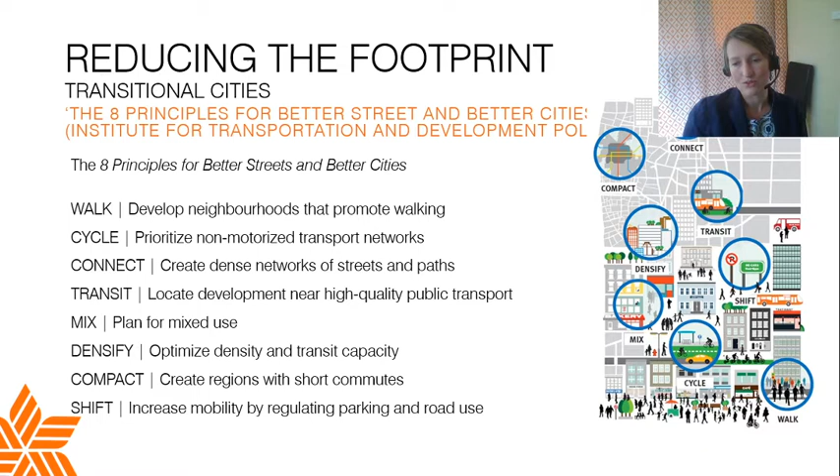So this is about changing the way we move. This is giving the opportunity to use more bicycles, to walk more, to connect with people, to have a more fluent transit, and also to densify, to save the land. I mean by that the agricultural land that gives us the opportunity to feed ourselves, but also the natural environment. And so this is about shifting to something different, where, for example, the car will have less space, or at least if it uses petrol and non-renewable energy, for example.

So if we look at the history of construction in Australia and the size of the houses, a study has been done to give us an average of the size of homes in different countries, and we can see that Australia, with an average size of 214 square meters, is pretty much a bad child in the history and in the world conception of using space for families.

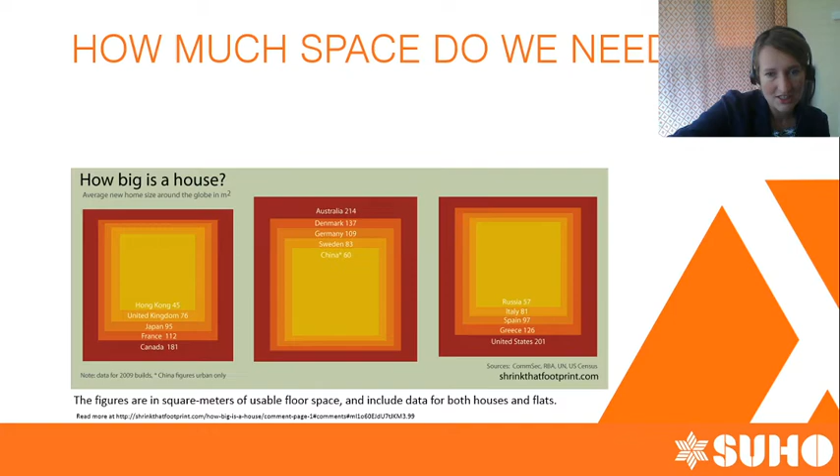Two of the main reasons are that the land is big, and I think there is no pressing need for reducing the size of the houses, but also because of the climate and the fact that there was not so much importance given to actually controlling the temperature inside the houses. So we can see that places like Hong Kong that have really high densities, or countries like Denmark where there are quite extreme weather conditions, have a small footprint for the houses. So the question is, how much space do we need to actually live in, and do we need to be big to live big?

So here is the situation of the project. It's on Glen Stuart Road in Woodford, in the development area, and the land is actually 310 square meters, which is pretty small. This is actually an affordable land at the moment, and what is really important in this project is to consider that we will deliver in the future houses that are energy efficient for a big part of the population. So we need to work with the constraints of small land that is affordable for most people, so they can really imagine this kind of project as achievable.

So how much space do we need? The 10-star house is actually only 116 square meters, on a small piece of land, with 3 bedrooms. If you look at the plan, we've really worked on the accessibility of the house, and we didn't want to sacrifice the healthy aspect, the affordable aspect, or the comfortable aspect of it.

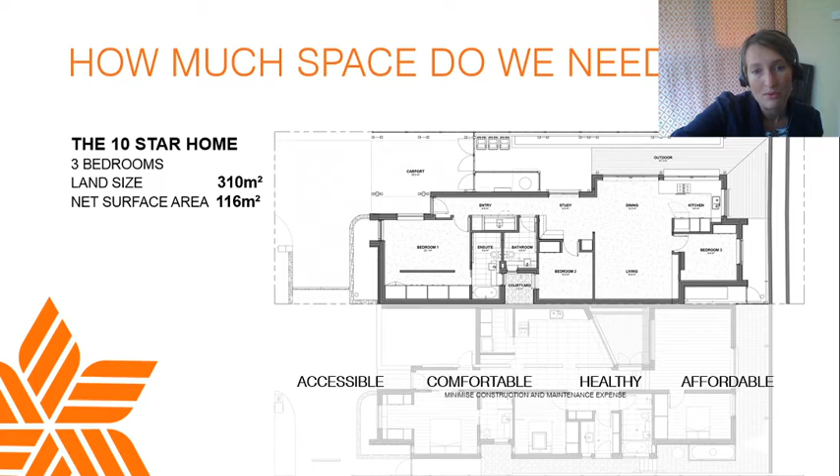This is about giving the opportunity to imagine a typology that's quite different, where even with a small surface area, we make it really efficient in terms of functionality and use every space. This house has a lot of transitional space, so we try to reduce the idea of a corridor, introducing laundries in the walking area, and having the nook enlarged at some point, opening onto a larger living area. Every space is used, there's a lot of storage, and there's a real relation between outdoor and indoor that gives us the opportunity to extend the space of the house outside.

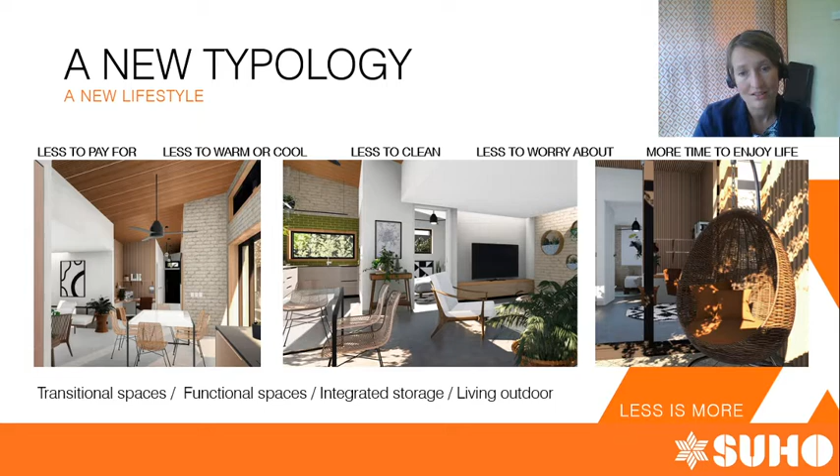Having a smaller house is also a new lifestyle. It's less to pay for, less to warm and cool, so in terms of energy saving it's really important. But there's also less to clean and worry about, so there's more time to enjoy life, and we shift the value of what's important to do with what we've got.

This is also about reducing carbon emissions. Working in the construction industry, we need to be really aware of the impact this industry has on the environment. If you consider the production of energy for residential use plus the energy consumption in the construction of dwellings, as well as the whole industry to make all these materials, we realize the construction industry accounts for about half of the carbon CO2 emissions in the world.

So there's a real concern about that, and I think it's necessary that we consciously work toward a different way to impact the emission of CO2.

One of these aspects is working toward clean sites and trying to reduce wastage on site, as well as the way we work with the trades—everything is recycled, and we're conscious about chemical use and what we do with the waste. But it's also, as mentioned before, about reducing the surface area. And after all, a really important point is using less energy to service the building.

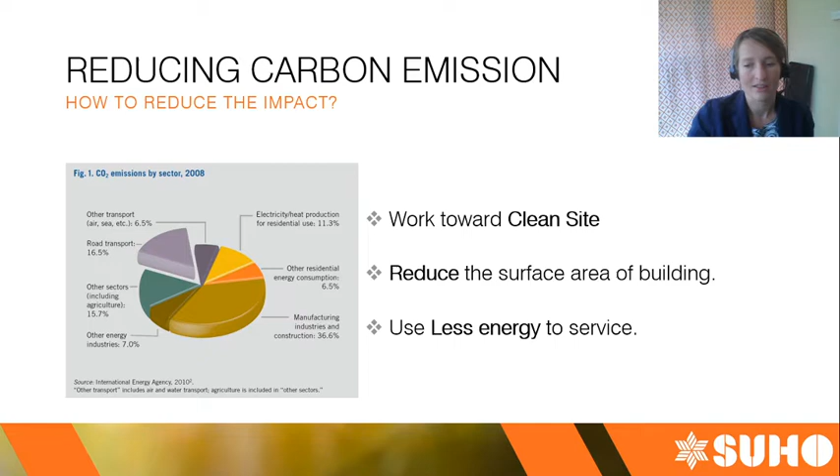Now let's go back to the 10-star challenge—it's a challenge, but also a really great journey. If we look at the average star rating of houses in South Australia, we're at about 5.4 at the moment, and the objective of the regulation is to move to a 6-star rating for houses as a minimum required for construction.

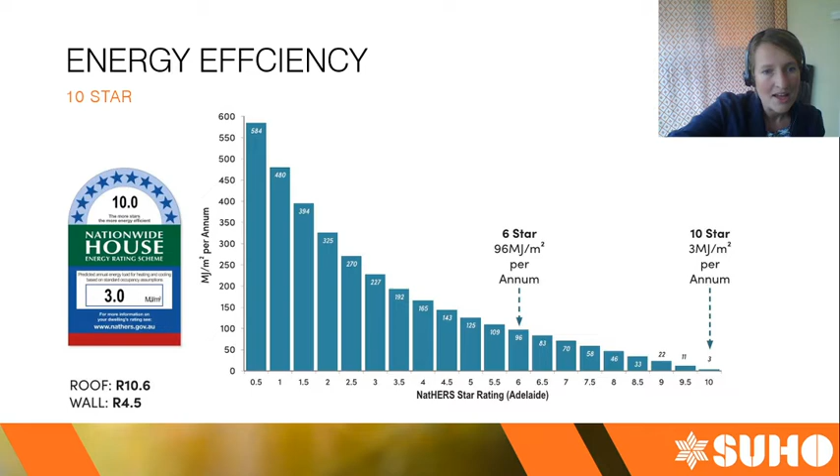Now 10-star is well over that objective. If you look at the consumption of a 6-star house, it's about 96 megajoules per square meter per year, whereas a 10-star house, which is basically nearly passive, is 3 megajoules per square meter per year. That has required thick insulation in the roof and walls, as you can guess, but it's also a more complex way to design that brought us to that point, and I'll explain it later.

So what does that mean? If we've got 3 megajoules per square meter—1 for heating and 2 for cooling—it means that most of the hours in the year, as you can see on the graph on the left side, are actually at an average temperature of 22 degrees.

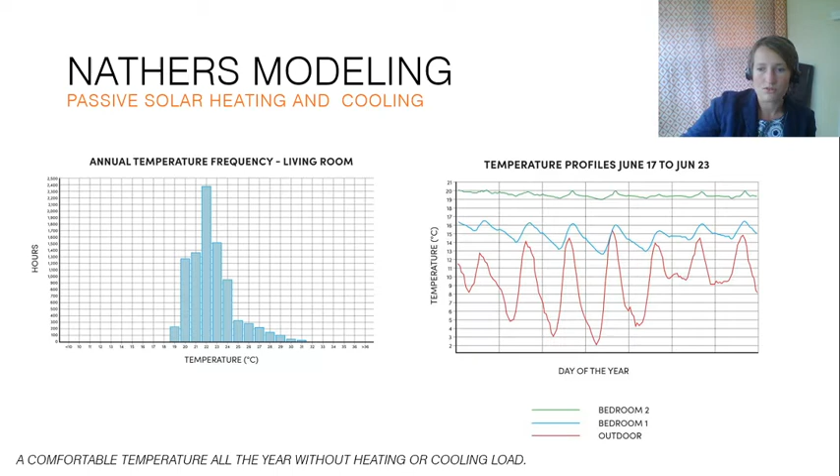So if we take this house without a cooling and heating system, we can see there's a really small amount of hours in the year where it actually requires energy to reach a comfortable temperature range. On the graph on the right side, the bedroom temperature all year long turns around 20 degrees, between 19 and 20, which is really comfortable. The other bedroom is lower, depending on its position in the house, but compared to the outdoor, the temperature is pretty good.

So how do we design a house that is a 10-star house?

This is a process that is quite complex, and requires knowledge into solar passive design, but also many different strategies in terms of how we build the envelope, how we work with the insulation and make sure it's safe for the building, which kind of windows we use, and how we produce energy. In this work, we went beyond the 10-star requirement to make sure all the aspects were actually taken into consideration, as we are really conscious that any certification system has its limits, and after all we need to work with reality. So we've been working on what we call a smart envelope, and delivering healthy and sustainable choices into the material and the energy production.

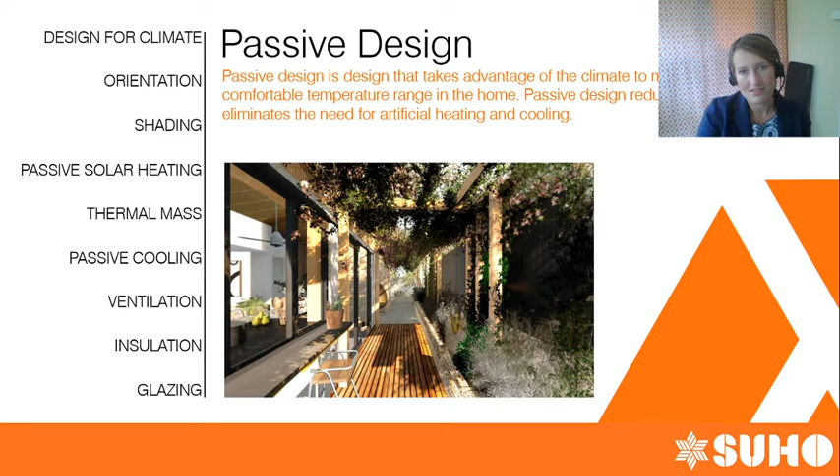One of the first principles used, and that is really important in creating a passive house, is to actually use passive design. I won't go through the whole system of passive design - that could be a whole webinar on its own - but there are many aspects considered to make a house with better passive design, one of them being to design the living area, bedroom, and service area with a sense of orientation. So this is north, you can see it clearly on the drawing. All the living areas are facing north in this building, and the bedrooms are southwest and southeast.

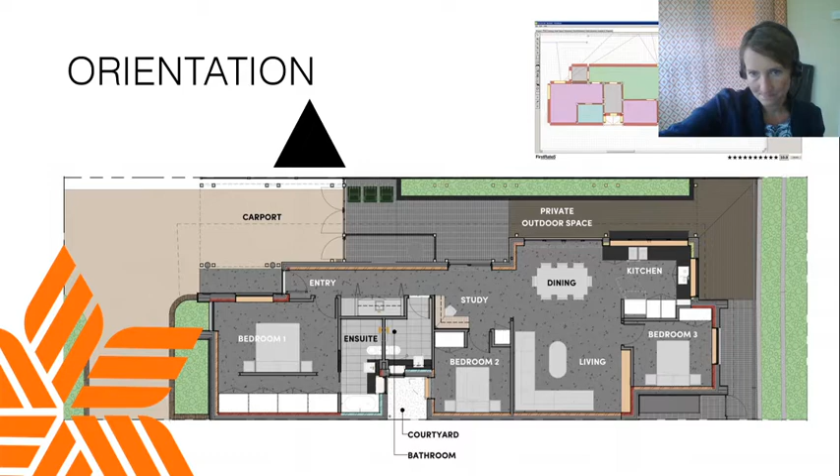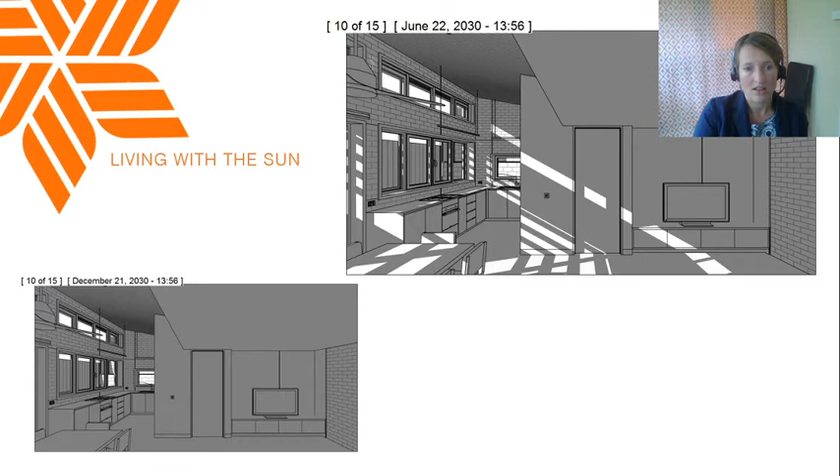To check how the sun works with the house, we've been simulating the building and the shading all year long. You can see on the right side that in June, in the middle of winter, there is quite a lot of light coming into the building, while at the same time in the summer solstice, there is pretty much nothing coming in. This allows us to regulate the temperature in a big way in the house, as well as the mass in the building.

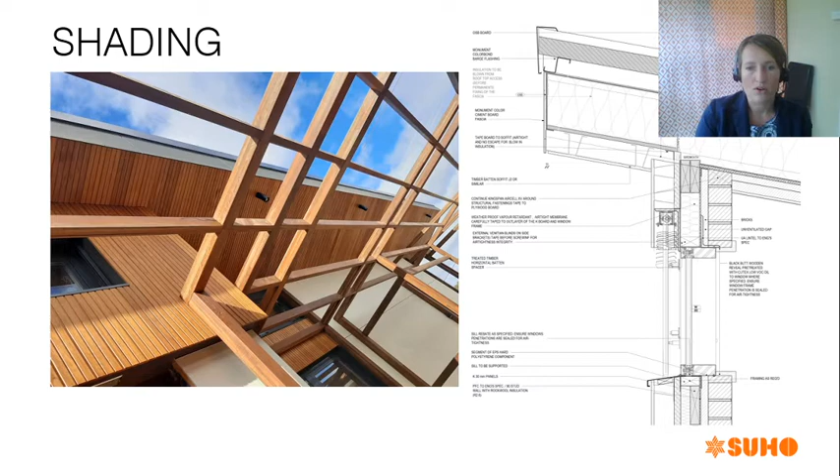So we've been using shading - there's a pergola outside with deciduous plants, and the size of the roof overhang is really important. We also work with outside shadings like Venetians, to actually stop the effect of the sun on the glass before it's reached, which we find is a lot more efficient. So all of this is going into an idea about controlling the orientation aspect.

Another aspect we've been working on is the thermal mass - 52 cubic meters of brick and 305 cubic meters of concrete slab in the building, a dark concrete slab, so we can work with the emissivity of the material. PGH delivered all the brick for this project, and we use them as a feature, sometimes rendering them to obtain a really nice architectural effect. This is about using the mass to keep the house cool in summer by having the material deliver freshness all day long, and actually warming up the house when the sun can heat the mass in winter.

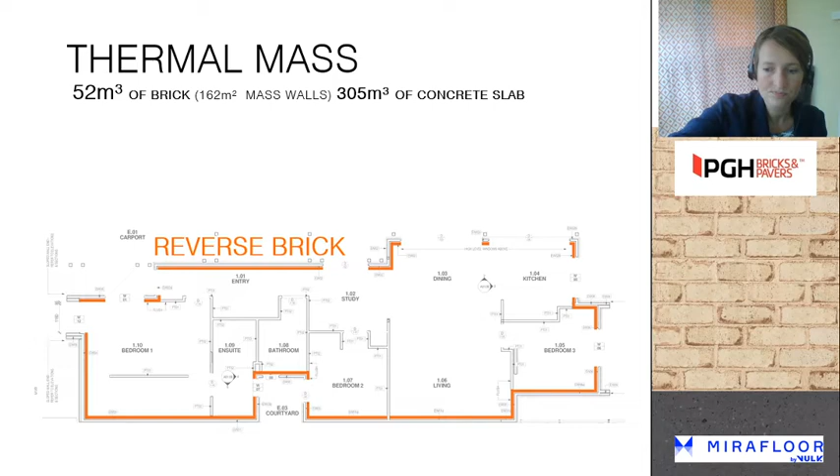The strategy about energy is really important. We made a strong choice of having everything electric, which we think is really important nowadays. We don't want to use fossil fuel energy, so this is a starting point for us to consider everything electric. We can lower consumption by using LEDs and rated appliances, and the system is pretty good in terms of star rating for that nowadays. We also use heat pumps and an HRV system that require a small amount of energy to run. There's a production of 5 kilowatt solar panels, which is kind of a basic solar production for a building, but as we double the strategy by using less energy with the appliances and requiring less energy to warm up and cool down the house...

...added to some REACT 2 inverters and batteries that will cover the use of the house mainly. So we've got 3 sets of REACT 2 batteries that ABB has delivered, and we also had a car charger for electrical cars, because we look to the future with this project, and this is what we want to see - electrical cars everywhere.

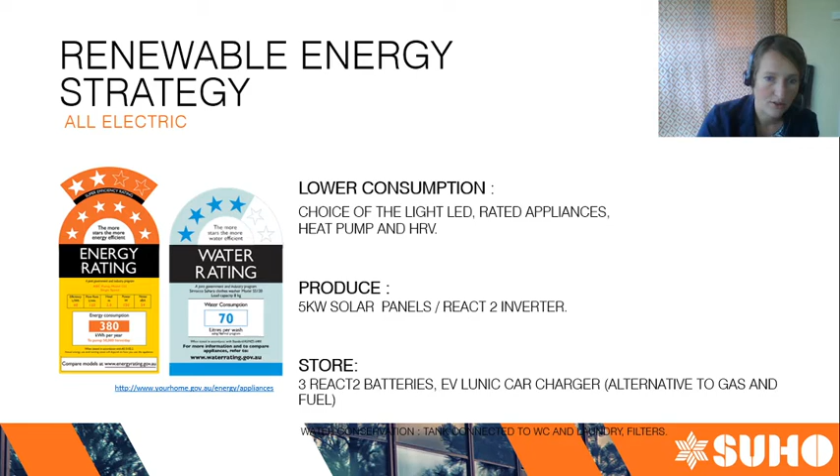The water conservation of the project has been considered too. There is a tank in the back, and a second one has been planned but not installed. The idea is, depending on the site and size we've got, to supply maximum water to be able to connect to the toilet and the laundry. Stiebel also offers filters to be able to use the water on site.

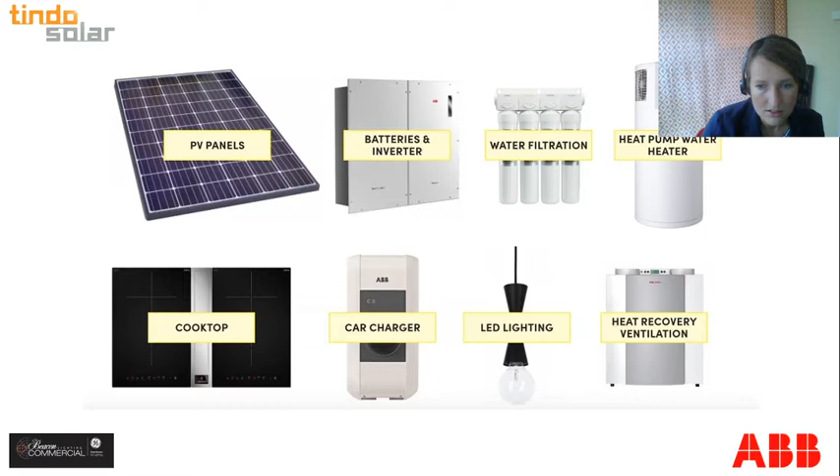So PV panel that Tindo Solar delivered for this project, and the battery, the water filter, and the heat pump that has been delivered, as well as the HRV by Stiebel. So this is all our partners that work with us to help us deliver this really high quality standard of house.

Now I will speak really quickly because I need to hurry up about the smart envelope, and show you that a big thought has been put into organizing the wall construction and the roof construction to achieve this high value.

So in the roof we've got smart joists that are filled with Supafil Carbon Plus blowing insulation, which is an interesting product because it's actually made of recycled plastic. This way we could achieve R9 in the roof, added to an Anticon blanket on top, just under the Colorbond steel roof.

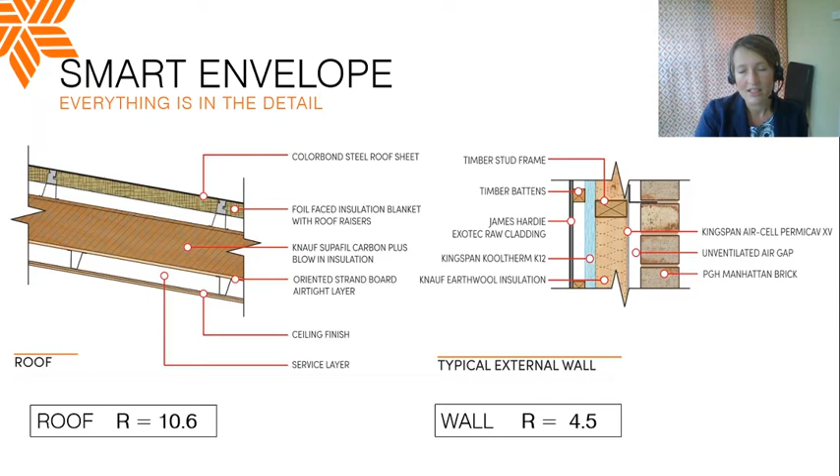It's really interesting to see that we had a thought about the ventilation in the roof and in the walls that also help with efficiency. It's a reverse construction, as you saw before, so we've got reflective layers to work toward the mass, and insulation on a basic 90mm stud with outside insulation using a Kingspan product called Kooltherm K12 that helps reduce thermal bridging.

One of the aspects we worked on, and one reason we use an energy recovery ventilation system, is that we work toward airtightness. One of the methods we use to work with airtightness is basically the red pen line.

Jess, my colleague, is giving some webinars around the airtightness subject, and I really recommend you have a look at it if you're interested, because you'll understand it a bit better. I won't go too far on this subject today.

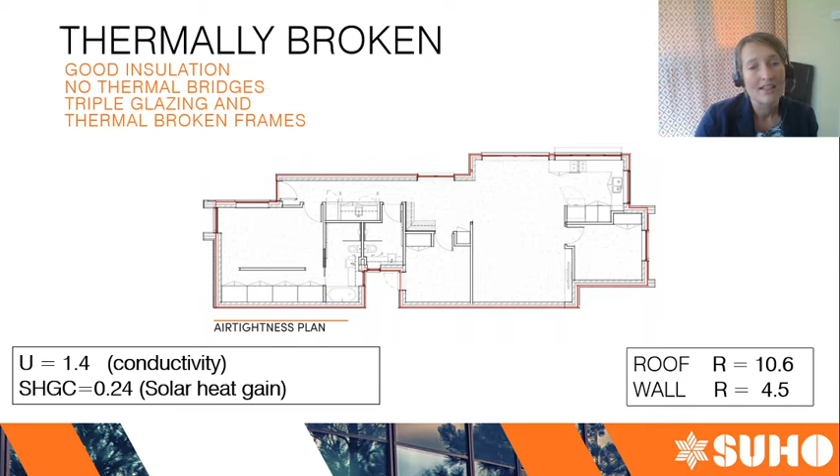So good insulation, no thermal bridges, really important. Triple glazing and thermal broken frame - that's about the windows too, part of the smart envelope we're working on.

So what we want is a healthy building, and as we put more insulation in the wall and in the roof, it's important for us to consider the way we decide to make this building airtight or not.

When there is a contrast of temperature on a surface area, there is a high risk of condensation, and this is due to lack of insulation and thermal bridging, but also to the lack of airtightness where there is air infiltration in. So we decided to really work with the airtightness too in this building.

The first test that was run at the end of the first week was really really satisfying. We obtained a 0.62 air exchange in the building, which is really promising.

To be able to work that out, first we have some amazing trades on site, but we also have really competent people working with airtightness within SUHO. One of the strategies has been to work toward the detail with these elements.

So the Kingspan board has been taped on the outside, and we organized service layers in the roof, in the ceilings, and in the walls, to be able to not interact too much with the airtight layers of the walls.

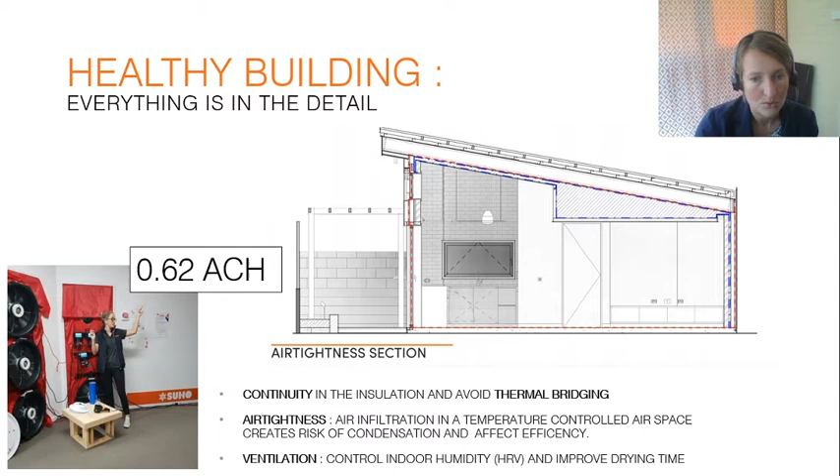By controlling the airtightness of the building and having a really airtight building, we made the decision also to ventilate the building, using a heat recovery ventilation system. This way we can supply fresh air full of oxygen all year long in the building if the users are not opening the windows.

There is software, the star rating software, that is actually using average users to be able to simulate the use of the building. But as we know, there is no average person, so no average users.

You feel safer in such a well airtight and well insulated building to be able to have a mechanical ventilation that is actually supplying fresh air. So that's what happened, and because the building is airtight, it's actually used to its best efficiency.

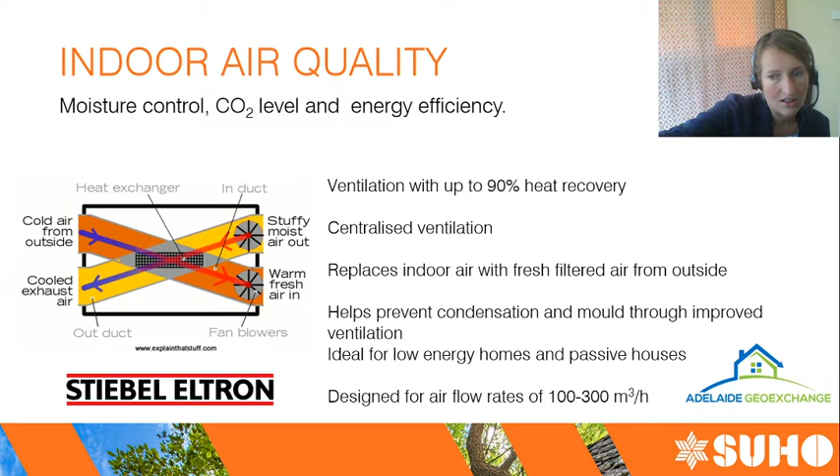So Stiebel Eltron delivered this for the project, and it has been installed by Adelaide Geo Exchange.

We also use some sustainable material, sustainable source wood, hardwood and timber, and also plasterboard that are green rated thanks to Knauf Gyps. And we give special care to use non-toxic components, low VOC paint and timber treatment, as well as...

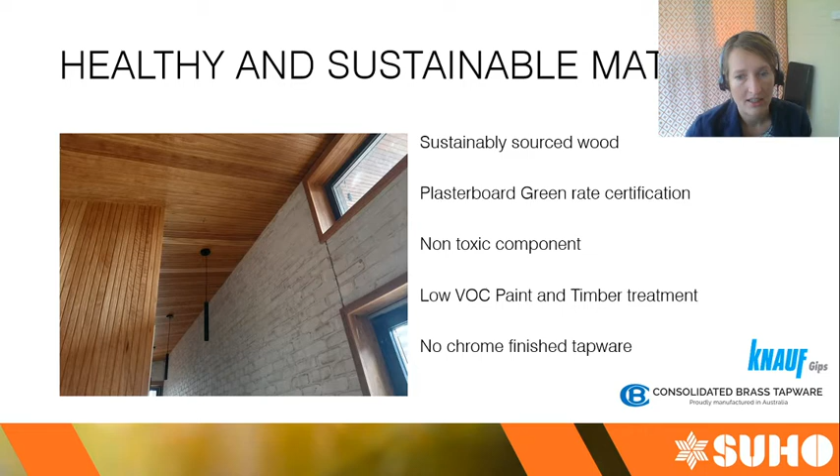consolidated brass tapware, so we have no chrome in the finish of the tapware, so it's a lot healthier.

So we went beyond the 10-star requirement, as you can see, and we also introduced an ABB product, called ABB Free at Home, to be able to have home automation set up in the project.

So basically, the ABB system is controlling the outside shading, the Venetian blinds, and the opening of the top windows, the lighting, and we've got a lot of overview on the system, like the hot water system and everything. So the users can have real-time information about the energy use and where it goes.

And also it gave us the opportunity to plug in another system that Smart Automation has designed to be able to monitor the house and have some feedback about all the work that has been done.